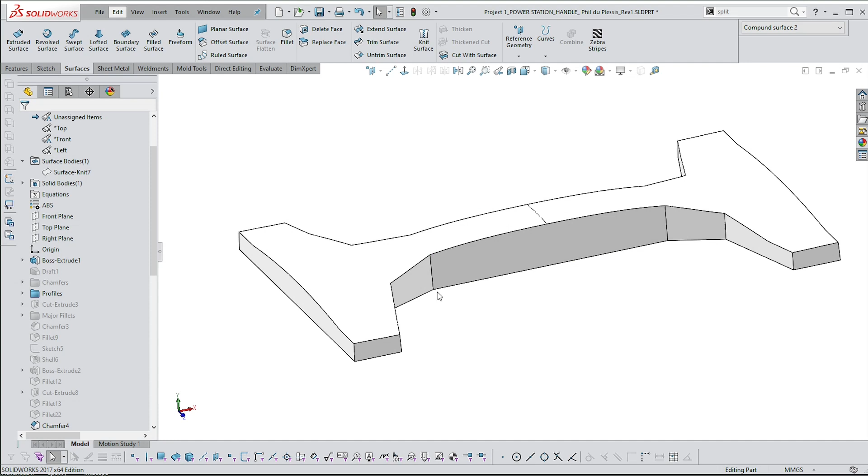So I'm going to put in some details here. Let's put in a fillet. When I select the second line, you've got the series of potential edges, all concave. The one at the end is the one I want. I've got it at 25, so that's quite nice and smooth. Say okay, and I will later on put in an edge between those three.

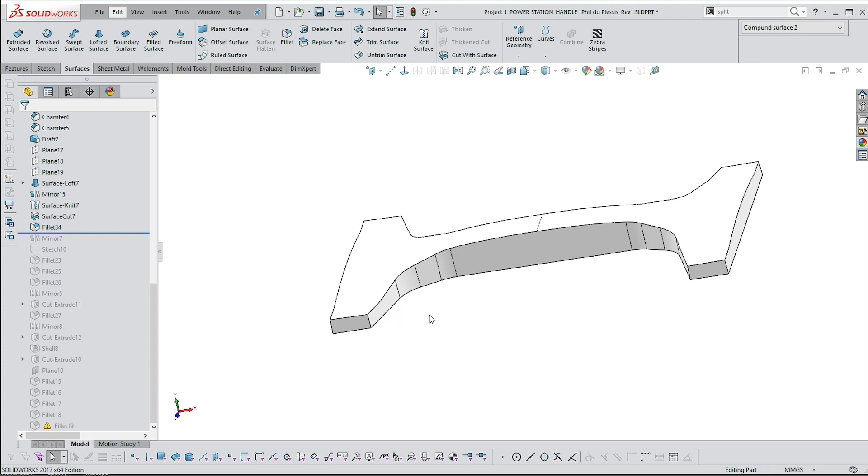Actually, let's do that while we're at it. Yes, we will need it. So let's put in another fillet. In this case, I want to just go to the all round. So select.

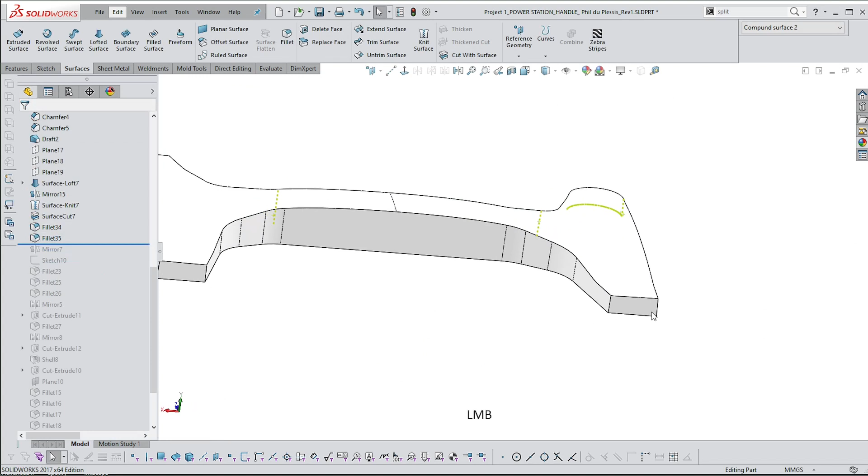You have to, unfortunately, go across to the control bar or the properties bar. Let's go to fillet. Let's do the same thing. So I'm going to want from there to that one, to that one.

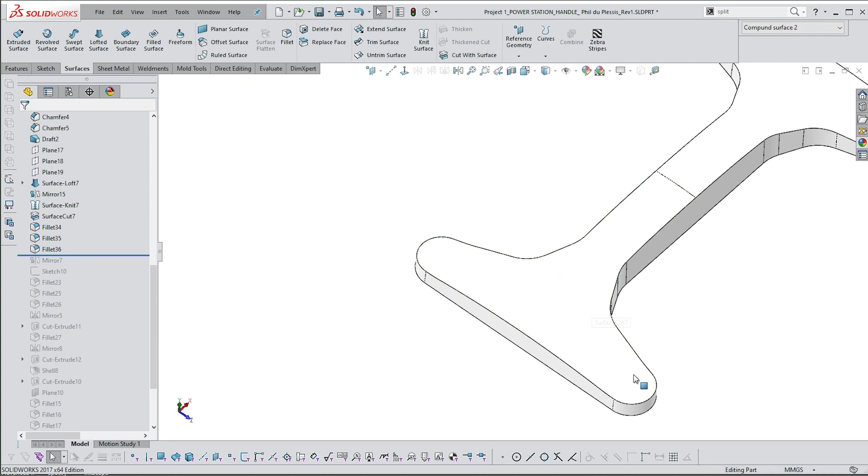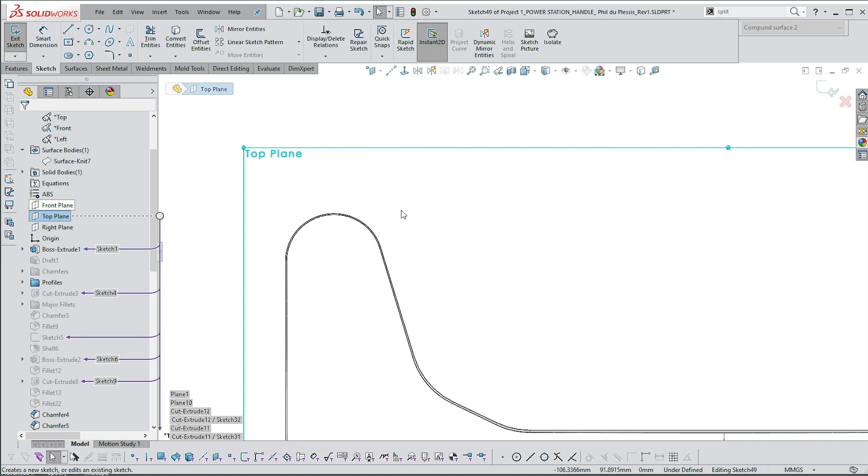Right, so now I want to place some holes in here, or cuts at least. There won't be holes just yet, so I want to put those on the top plane. Those will be extruded cuts, but they won't be all the way through. So I'm going to go to the top plane, and I want them to be concentric with this line.

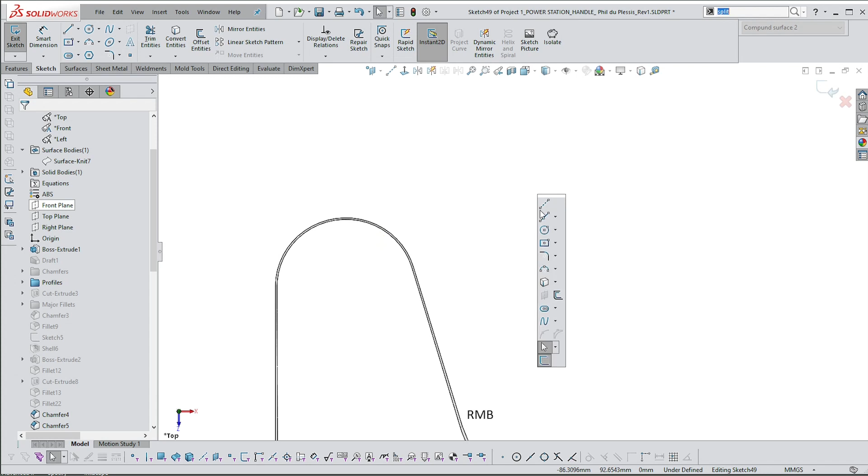But because that line there is not a circle, it's not going to do it. I'll show you. So if I try and get a center mark, I can't. It doesn't work. Even if I go with that point there, I can't find a center point. So there's a workaround here. You just go to your center line, select that point, come straight out, and then do it again.

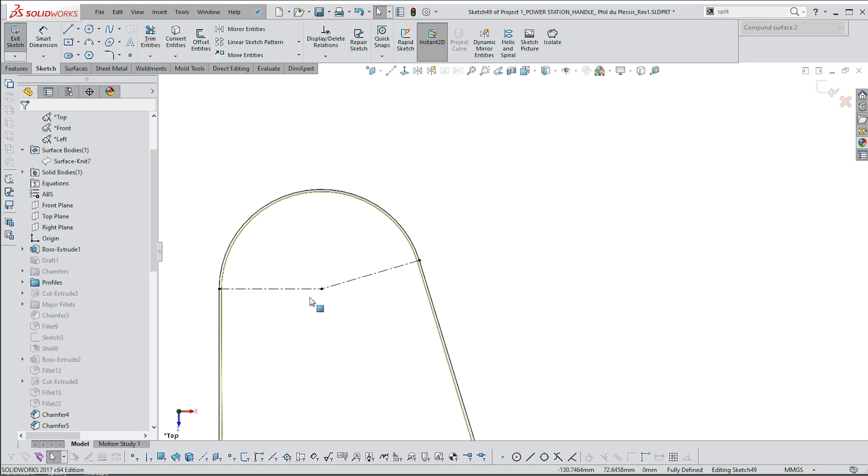So let's go from there, right? And then we just need to reintroduce, or make sure that this line and that line are perpendicular to one another. There they are. And then I can just join those two by saying corner. So now I'm absolutely certain, because of the geometry, that it is as concentric as it can be with that line. So let's put a circle in here.

I want this to be 14 or 15, somewhere around there. Okay, so now it's fully defined. I'm going to exit, and I want to cut from the top surface down.

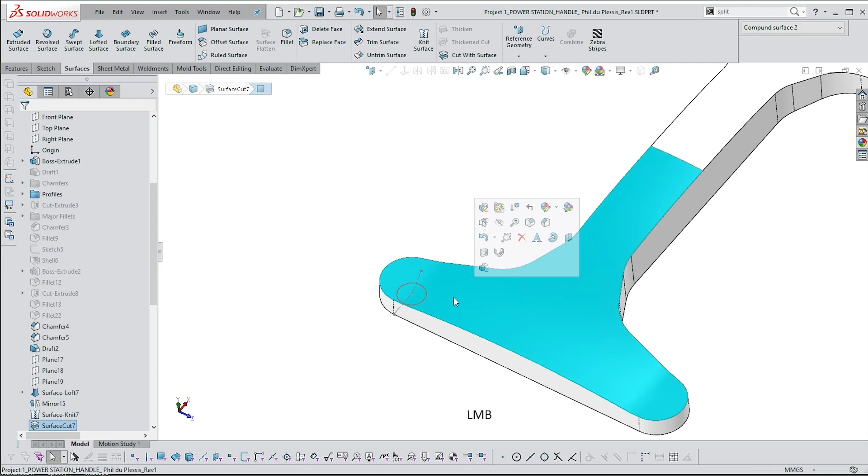But I don't need the sketch to be on the top surface. In fact, at the moment, I can't even place a sketch on the surface because it's not planar. It's a compound curve, so it has curves going in both directions. Solidworks wouldn't know where to place that sketch.

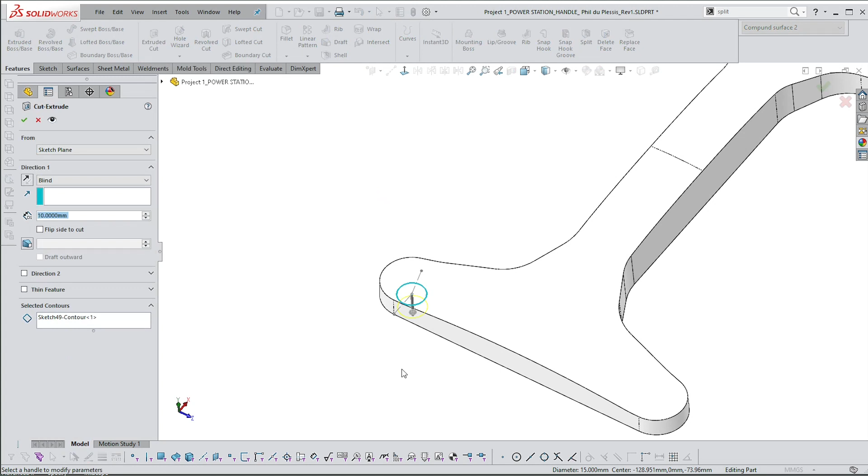So with that selected, I'm going to go to the features and go extruded cut. But I don't want this cut to start from the bottom. I want it to start from that vertex. So I'm going to go to here, to vertex. Select that, so now you can see it's going from the vertex down.

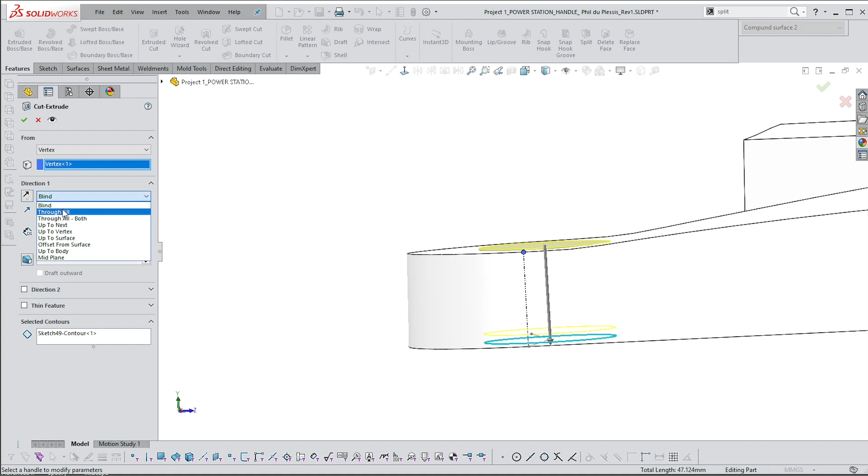And if it's not cutting both ways, you can always just go both mid-plane. And I want it to cut about, let's say, about 10 millimeters. So we don't want to cut all the way down, 20. I don't know if you can see, the blue is the line, but the yellow is how deep it's cutting. So if you choose the mid-plane, make sure you double up the dimension.

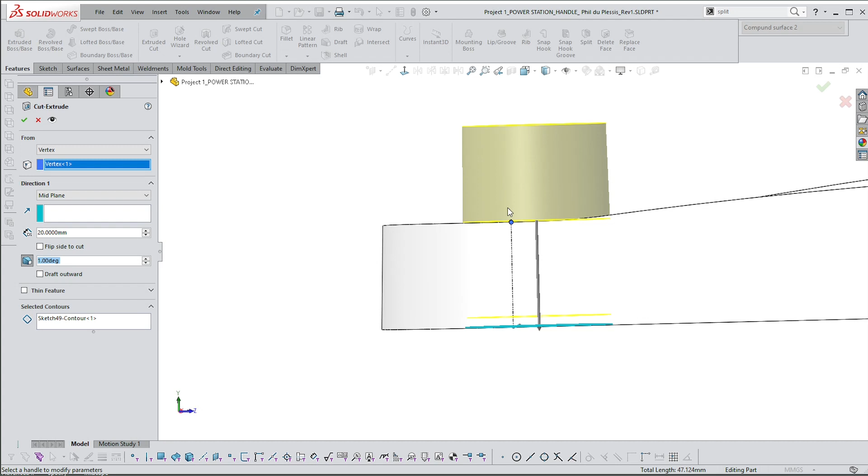And then I could put a draft in here. I'm going to put a draft in. You can see it's drafting in the correct direction, so it's going down and down. If I draft outwards, it's going to go like a cork. It's the wrong direction. Say okay, and it's trimmed.

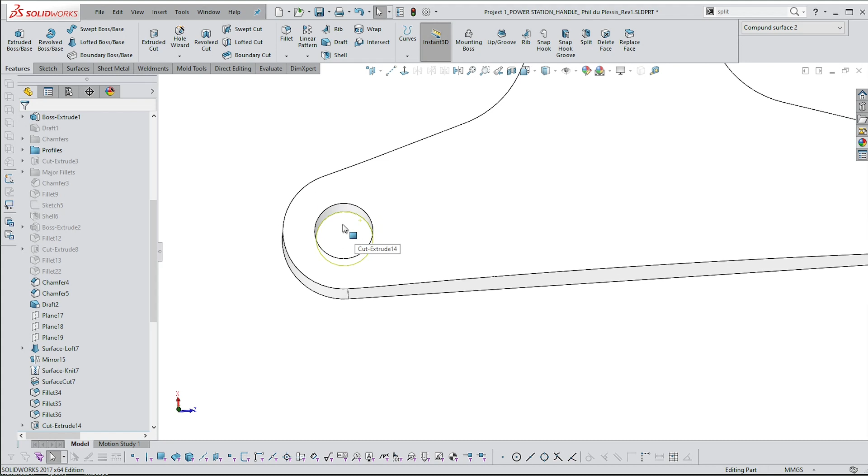Okay, so that's trimmed down to just that point. You can see this is nice and flat on the bottom, so I don't get that going all the way through. I get sort of a landing where I can put a hole in so that I can put my screw through.

Right, so the next thing I want to do is I want to pattern that. So I'm going to go back to the top plane and put a sketch in here. And then I want to create a pattern of points. So at the moment, since I've got no center lines, and they're going to be useful, let's put some in.

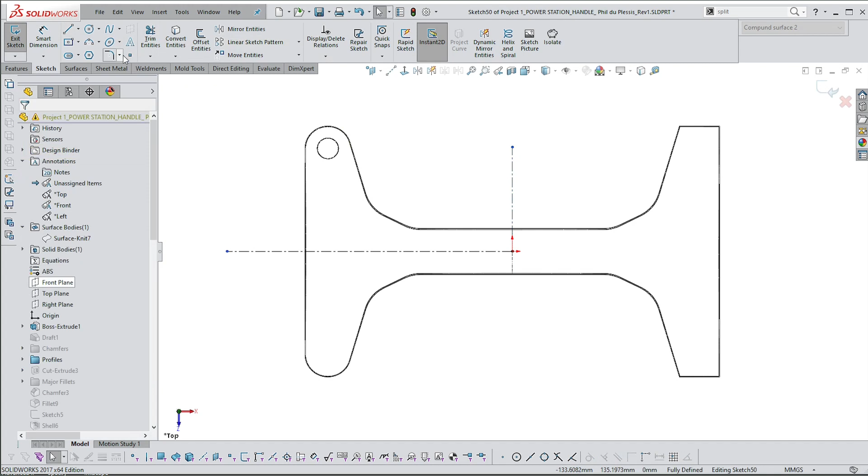And then I want to put a point in here, and because that's potentially the bottom one should be... nope. Okay, so we're not going to get that either. We're going to have to perform this same trick.

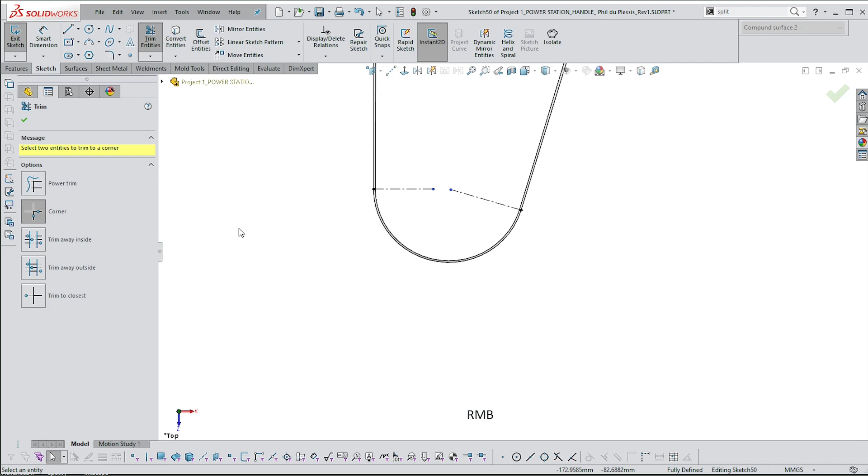We're going to have to go from there and from there, and make sure that that line and that line are perpendicular to one another, and then get them to snap. And then I'm going to place a point in there, and then I should be able to just mirror that. So let's just mirror that around that one there.

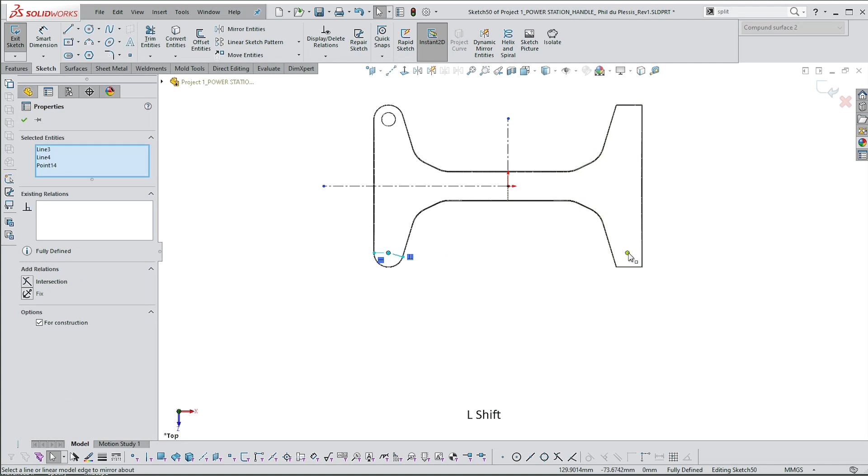Doesn't seem to have done it, but maybe there, we'll do it. So I want these two points selected, and I want them to mirror around this vertical line, so click on that, say okay, and then you should be good to go.

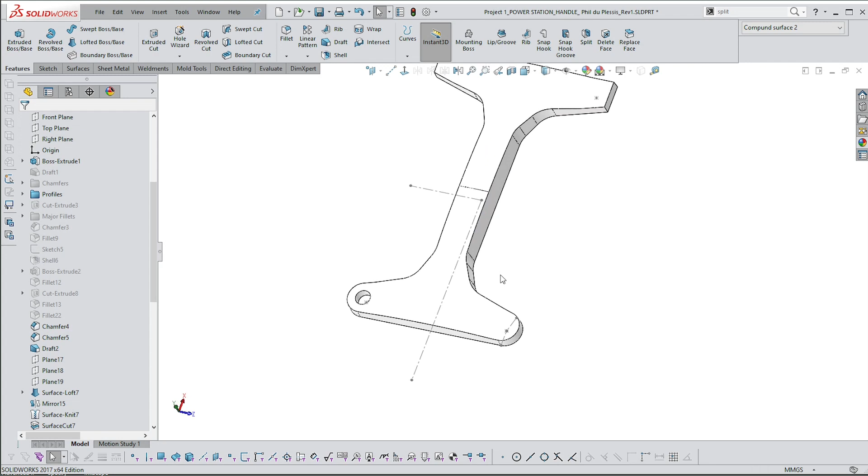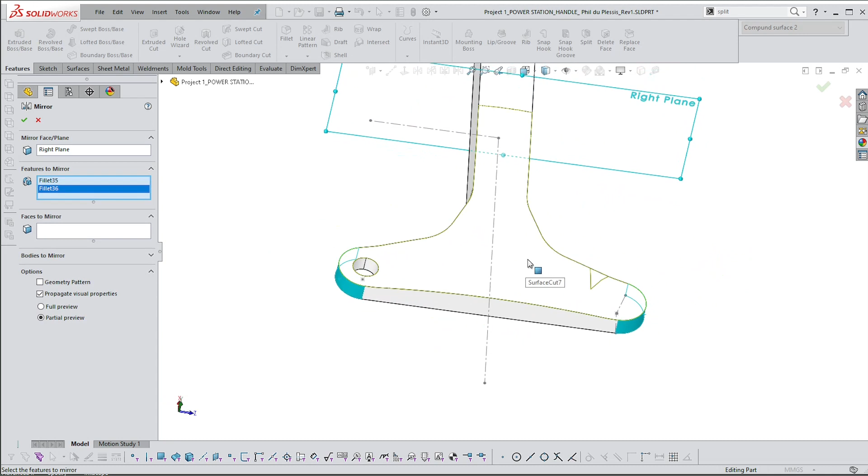That I'm going to use shortly, but let's first get this feature mirrored. So once again: top plane, right plane, and a mirror feature, and here I want features to mirror, not bodies. So that would be this feature and that feature. I should actually do this a bit later when I have the curves in. No, actually this is a good time to do it. So that should be all right.

Doesn't like that. Okay, if you get this 'face for fillet chamfer does not exist' error, just try the geometry pattern button. That should solve it. There we go, we've got it.

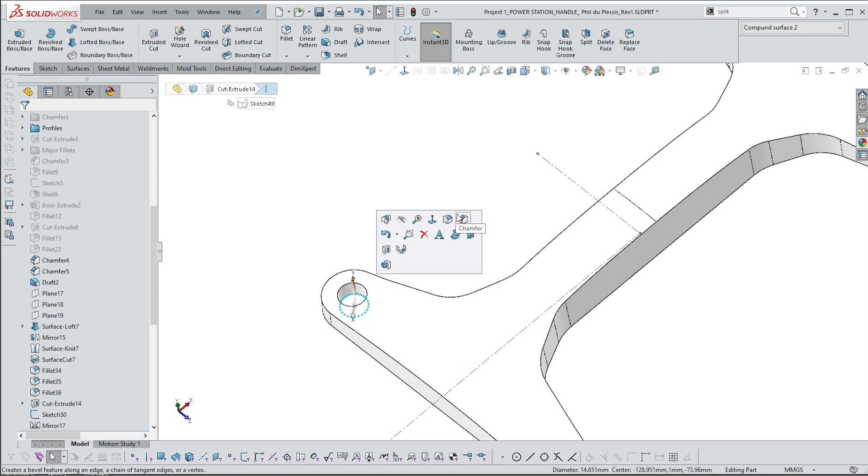Now I want that item to be patterned using this sketch, but I want to add one feature in first. So let's add a fillet in there of, let's say, 0.5 - very small one - maybe a bit more, 0.7.

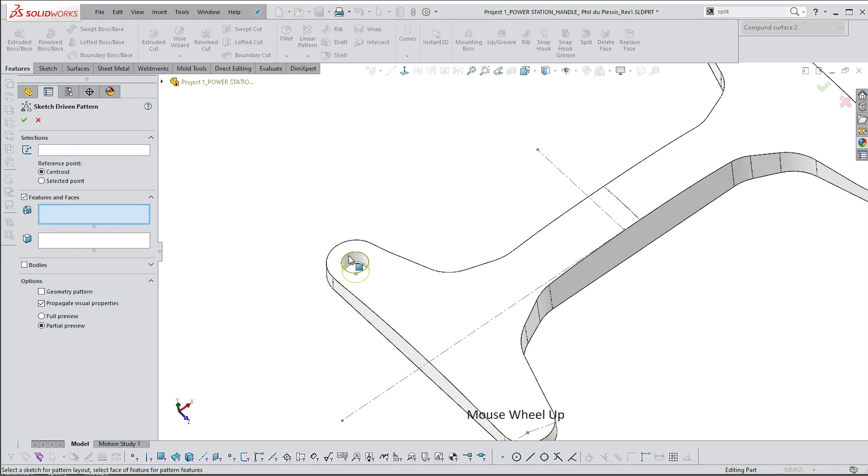Okay, so I'm going to go to linear pattern, and I'm going to say sketch driven pattern. Curve driven pattern relies on a curve; sketch driven pattern you can have points. Let's keep it simple for now, so features and faces. Let's select the features we want: cut extrude, and the fillet.

And then, so you should be able to actually select this sketch now. There's one, okay, there we go, brilliant. All right, so if I say yes.

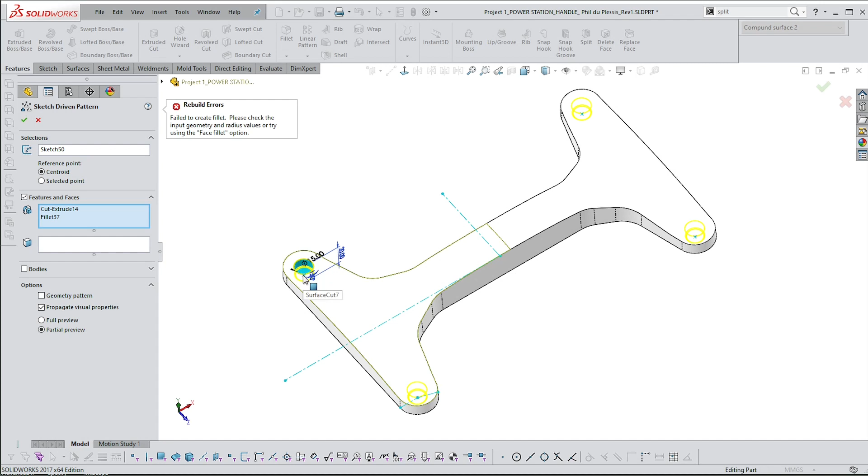There's a problem here because that sketch contains a duplicate, so I'm going to have to go back to that sketch. Let's find that sketch - where is it? That sketch there, and just make sure that one there is deleted, so we've only got the 3.

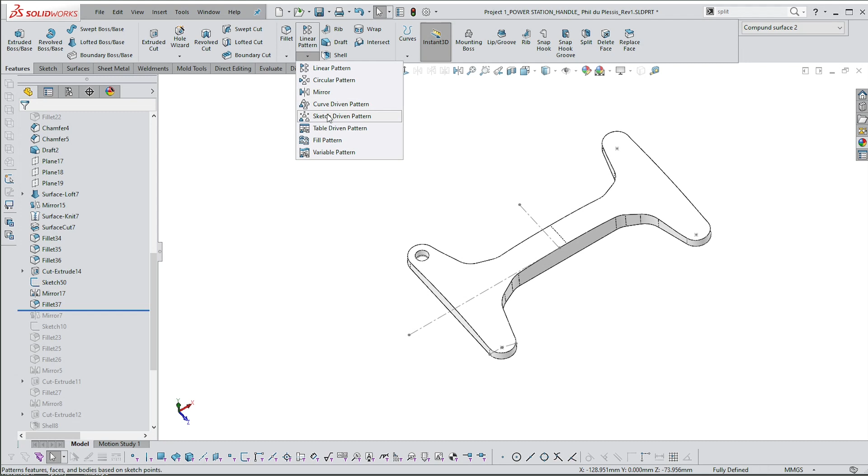Okay, let's try that again. Linear pattern, sketch driven pattern - you should be able to select the sketch. There we go, that's selected it. And then the features would be that and that. And if you say yes, those 4 are now placed.

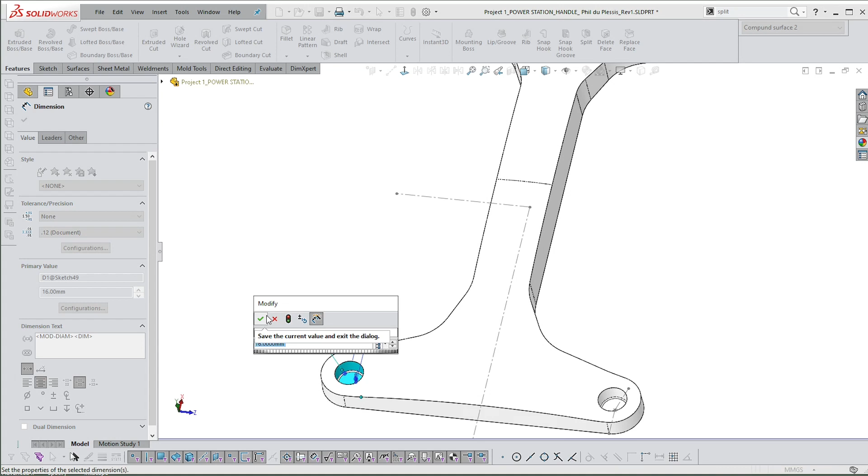Which means I can just go back to this original one, and if I change one of these - let's make that a little bit larger - you'll see it updates all of them at once. I don't know if you saw that one grew, but it did. So minimal amount of work required.

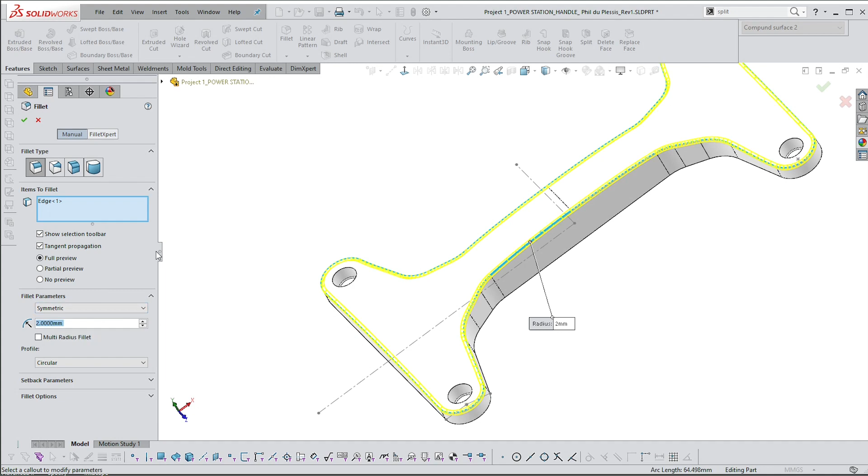Okay, and then we can put in fillets on this edge - I just want it on this edge, because I want those other edges nice and sharp. I was going to put in a cutout here, but I'm not going to do it - you can without a problem. Let's make that 2 or something like that. So to shorten the video, I'm not going to show you how to put in a cutout, you know how to do that already.

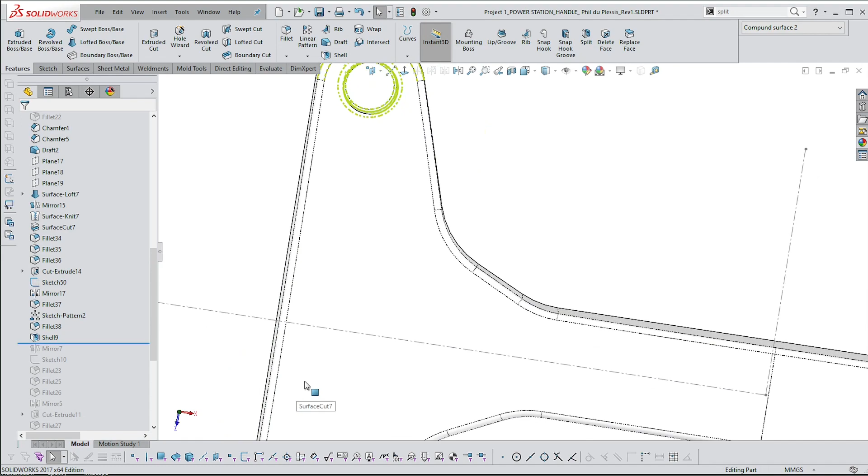And now I can go to the shell button, and I can shell this, giving it a thickness of, let's say, 1.6 or something appropriate. That sounds right. You'll see it's shelled, but it's left this piece alone, which is perfect, because then I can put holes in and match those holes to this pattern.

I can now also do a cutout. So if I go to the front plane and put a sketch in - let's see if we can get this done as quickly as possible. So let's go with that, just get that to sit upright, and then go with that there.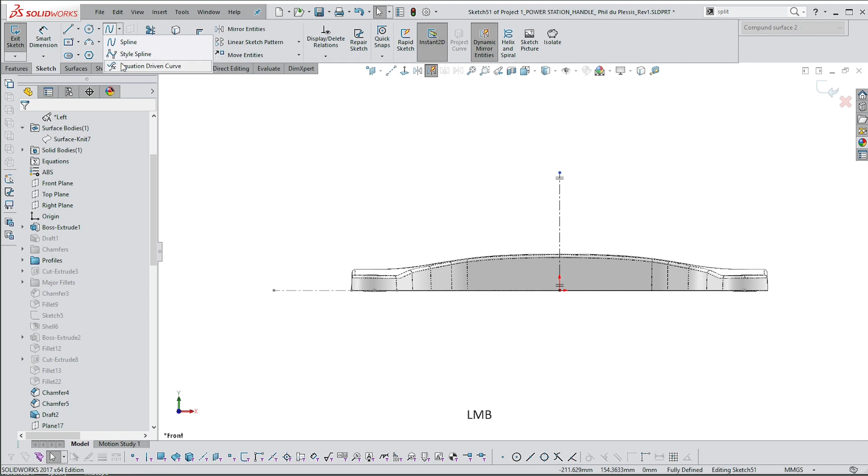And then if I go to style spline and start around here, make sure it goes to that point. We want to make it as simple as possible, so that's cool. Make sure that line is horizontal so that you've got tangency occurring here where those two points are.

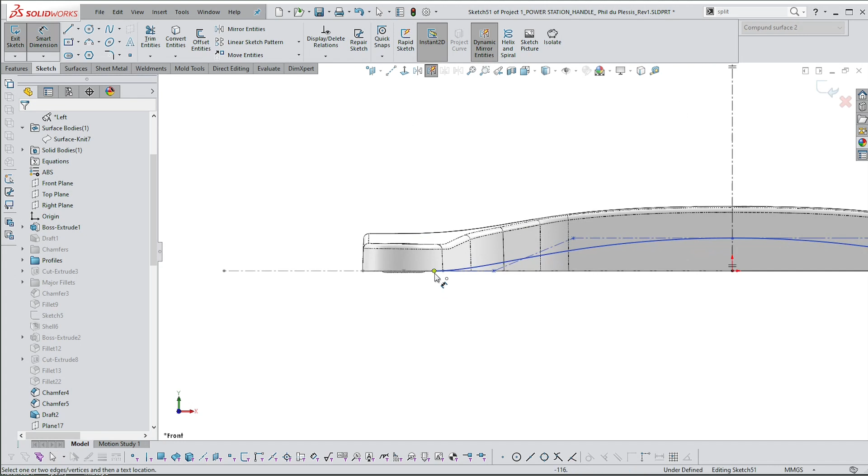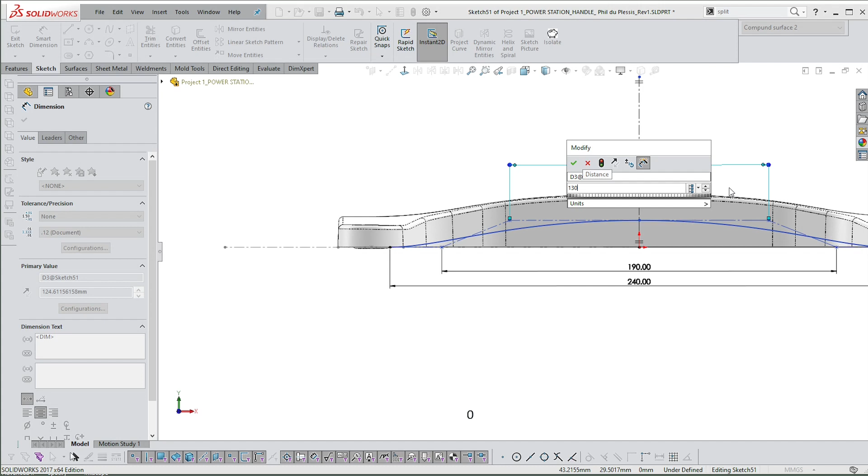Put some dimensions in, which shouldn't be a problem and shouldn't be too much extra work because you've got everything going across the center. All right, so 190 - let's give that a height. No, we can't - now we can give that a width. What's great about this is we only need 3 dimensions, I think. We do need a width, a height there - let's make that 15.

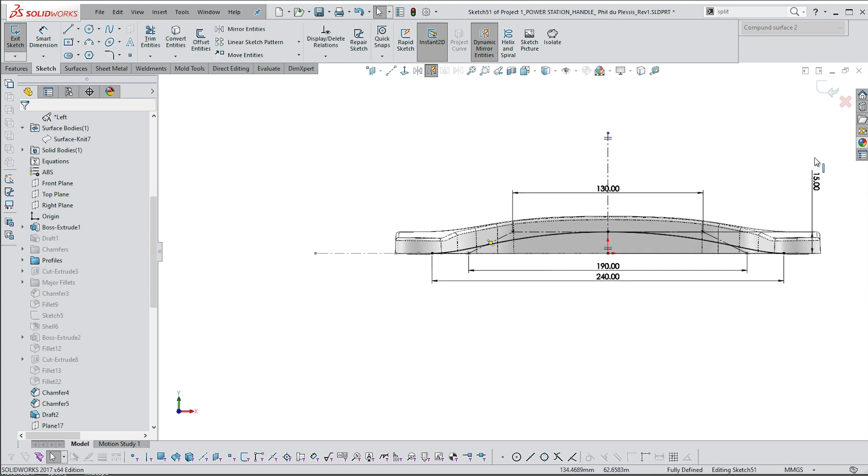Doesn't seem to be quite right. I know what needs to happen - that and this line, or one of these lines, needs to be made tangent. There we go, there it goes black. All right, so now you can control this line.

I'm going to exit that, and I'm going to use that line just to cut. So go to extrude cut, be sure that little item there is pointing downwards, which is correct. We want to go through both, and then we say OK, and there we go - we've got this sliced in half.

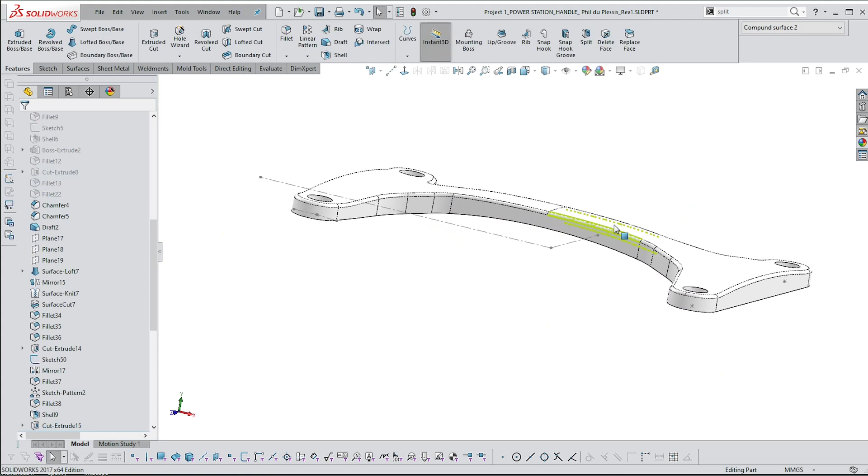I'm not really happy with that, so this 15 is not great - make it about... that's a bit better. Right, so far so good. I'll continue with the ribs in the next video. See you then.